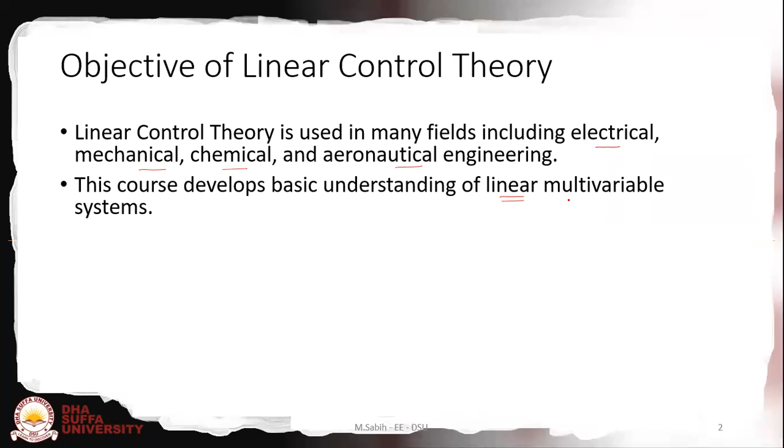The main objective of this course, linear control theory, is that it is used in many fields including electrical, mechanical, chemical, and aeronautical engineering, and many more fields. By doing this course, you will understand basically the linear control systems or linear multivariable systems.

There are three main areas in which we will focus. The first is the modeling, analysis, and the controller design for a linear system. We will do this in both discrete time and continuous time. In continuous time, we will have signals like x of t, u of t, and y of t, while the same signals in discrete time will be x of k, u at k, and y at k.

So obviously k is the discrete event. It may be 1, 2, 3, an integer, while t is a continuous time variable, where t can be, let's say, 1, 1.1, 1.2, and so on.

After completing this course, the students will be able to do the analysis, the control, and the design task. And the good thing is they will be able to deal with different systems. This capability will come because we will see every system from their mathematical perspective, mathematical model.

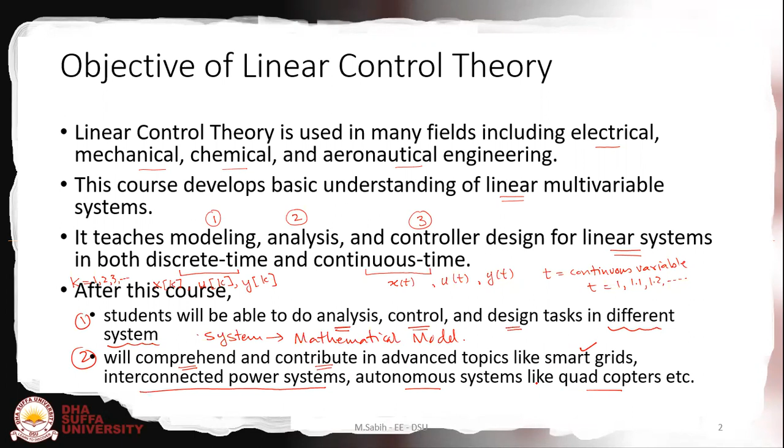The course plan is, we have divided this course into 3 parts. The first part will be based on the modeling and analysis of the linear system, and our plan is to cover this in 4 weeks. I will be caring about the first part. My name is Dr. Mohammed Sabih.

The second part will be based on the controller design of the linear systems, and we have assigned week 5 to week 10 for this part. Dr. Imtiaz Hussain will take care of this part. Part 3 will be the linear optimal control from week 11 to week 16, and Dr. Salman Zaffar will take care of this part.

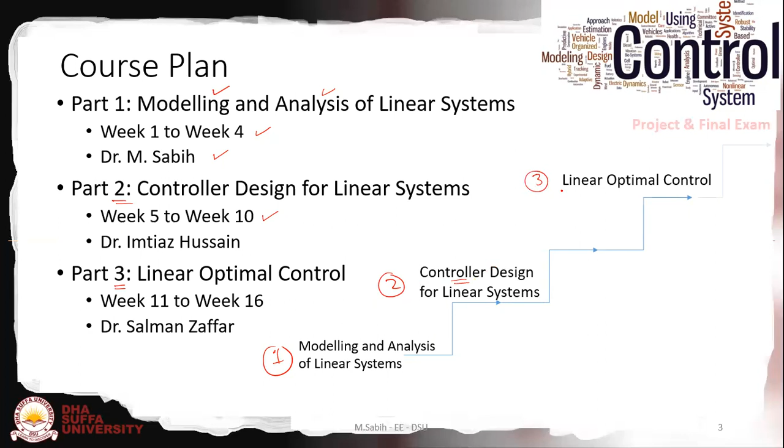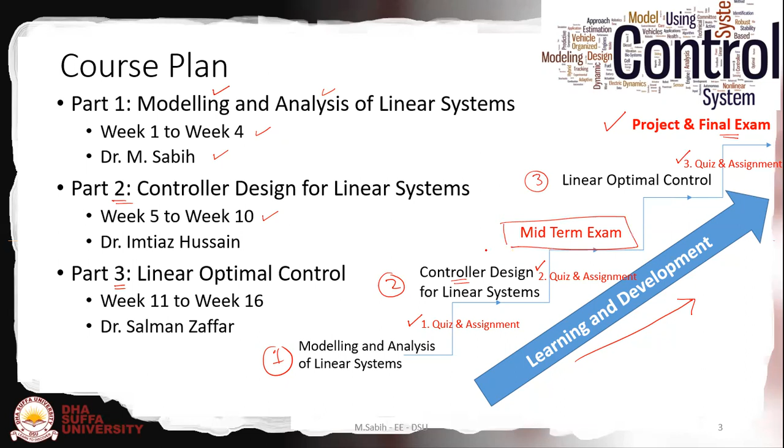Our learning will start from modeling and analysis systems. After that, you will learn and focus on controller design, and finally the third part will be about linear optimal control. This course will end with a project and final exam. During this whole learning and development phase, we have planned one quiz and assignment for the first part, another quiz and assignment for the second part, and another quiz and assignment for the third part. In between, you will be given a midterm exam.

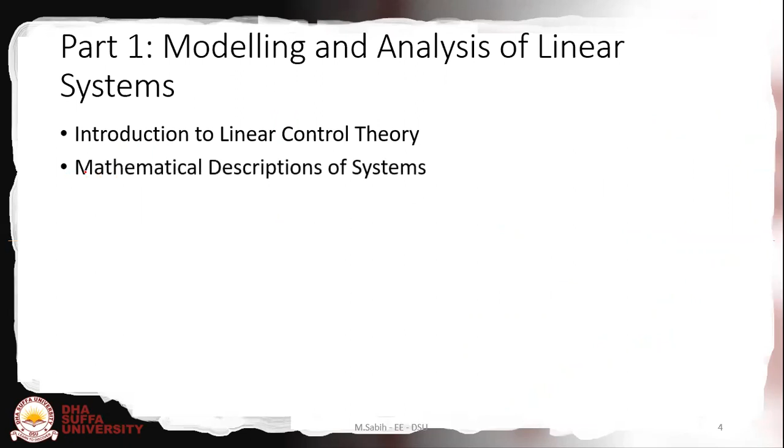Now the details of the modeling and analysis of the linear systems. We will first introduce the theory of control systems, the linear control theory. We will go through some of the mathematical description of the systems. For this, we need to go through a little review from linear algebra to deal with linear control theory. We will focus on the state space realization, and we will also deal with stability, controllability, and observability.

So after learning all these aspects, what you will be able to understand is such kind of simulation model. For example, this is in MATLAB. In this model, you can see we have a source feeder here, 11 kV, and behind this we have a mathematical model.

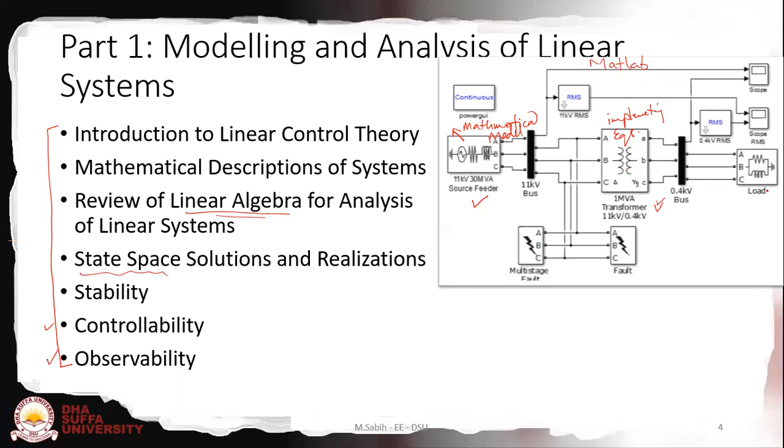We also see the transformer. Of course, this transformer is implementing all the equations behind this box. We have a load, mathematics is there. So this whole thing will be easier for you after doing this modeling. This is an example of the block diagram, another way to represent the mathematical model, and this is the power system modeling and simulation.

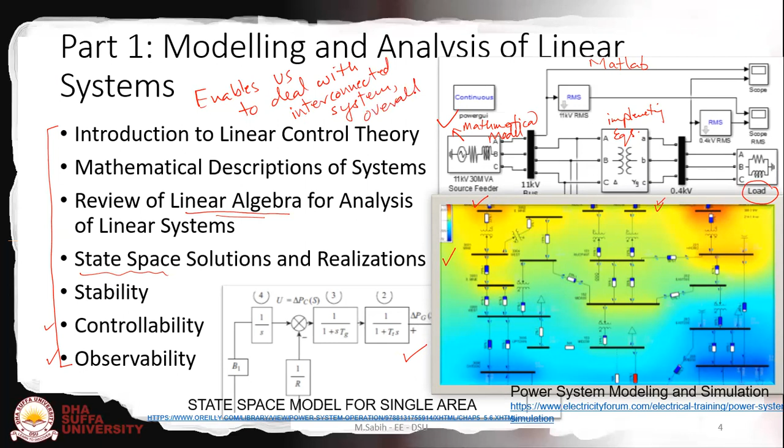After having all these equations and the controller design, you will be able to do modeling and analysis in the software. For example, this one shows a small portion of a grid, a connected grid of a single area. So modeling and analysis basically enables us to deal with variety or interconnected systems, and we can see the overall performance and dynamics.

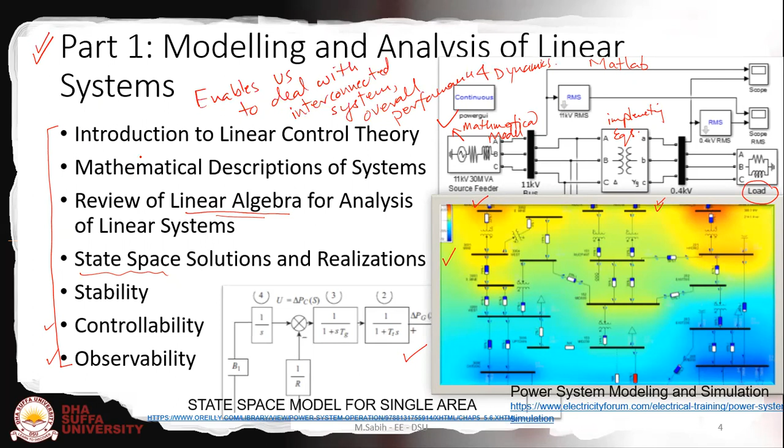Okay, so this is a very important part, and it is so crucial to learn this part. Next comes the second thing, which is mainly the controller design.

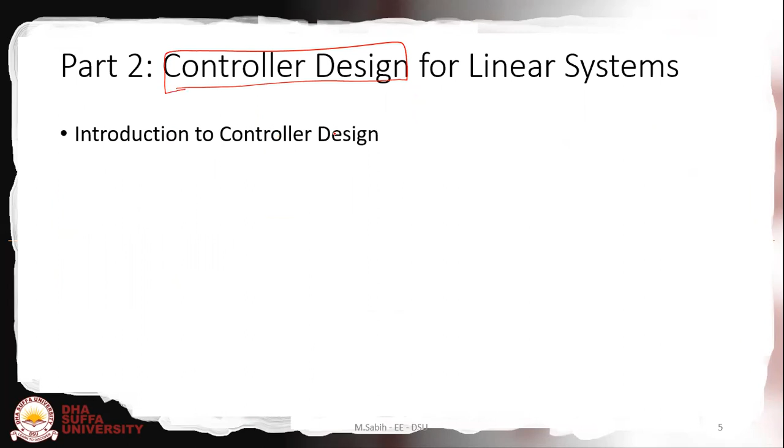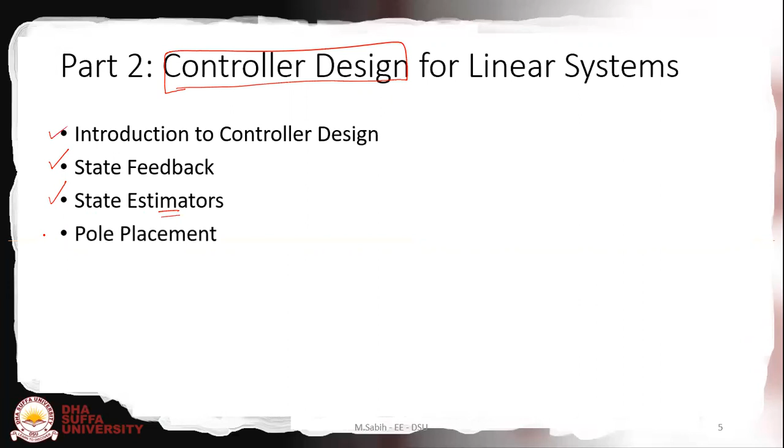We will start with the introduction of the controller design. There is a special kind of controller called the state feedback technique for controller design. And sometimes the states are not observable, so you will also learn about state estimators. And there is another one, called the pole placement method.

Now, this is another example of application of the state estimator. I'm focusing here. This may be a complete power grid, and from the power grid we have a connected SCADA, and we are having all the data here. Having the data here, we can do analysis, we can figure out the bad data, and we can do some kind of optimal power flow and other energy management tasks. And we can even identify if there is an attacker here, and the operator can act appropriately.

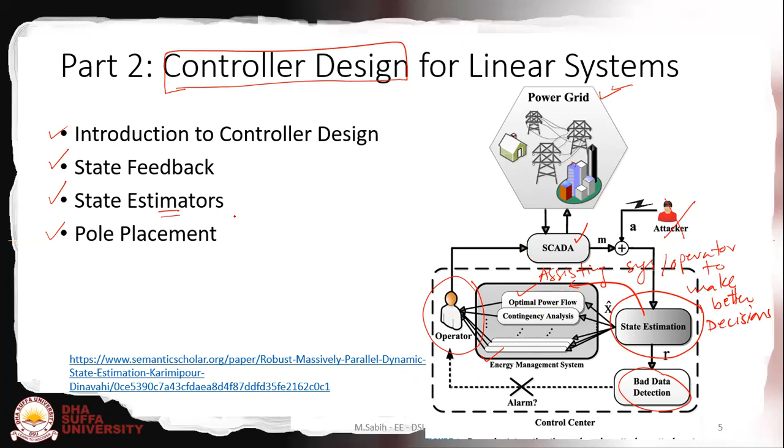Basically this state estimator is assisting. This will assist not only the system but the operators to make better or correct decisions, because it's so difficult to understand all the time. We need state estimators, since sometimes some states are missing and we cannot identify them. So the state estimator application is what I just showed you here.

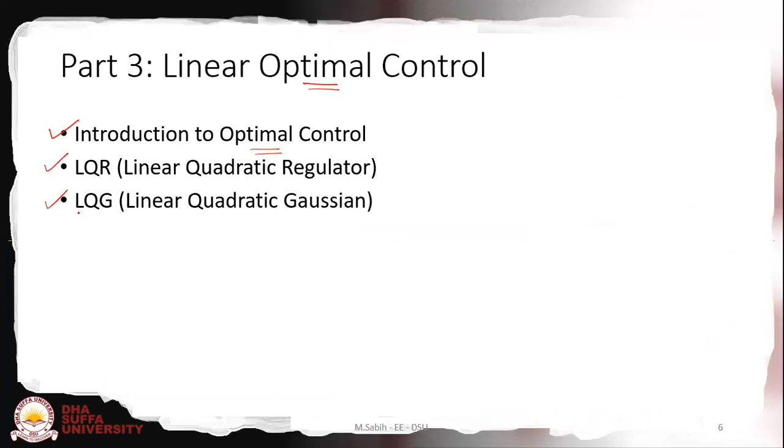The third part comes here, very interesting and very applicable, especially from the economical point of view. In the third part you will get an introduction to this. This is an addition to our course. You will learn about the LQR, and the LQG, the linear quadratic Gaussian and the quadratic regulators.

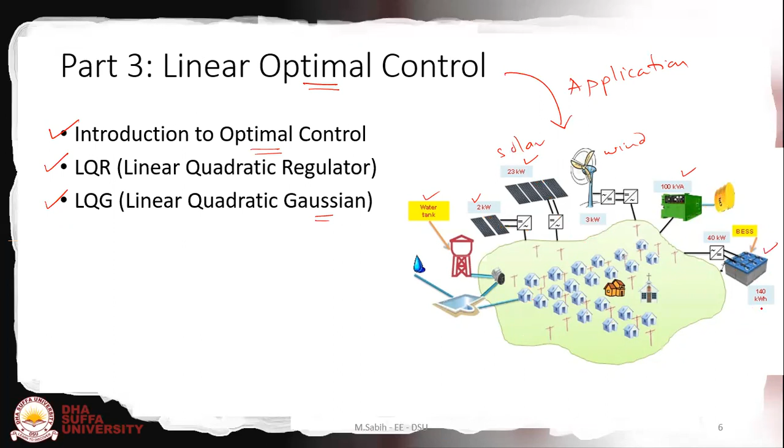This is an example of the scenario in which this optimal control applies. This is an application. So in this application, you can see a small village: we have a water tank, a 2 kilowatt solar system, a 23 kilowatt solar system, a 3 kilowatt wind turbine, solar, wind turbine and diesel, 100 kVA oil, and a battery storage system of 140 kilowatt hour. This is a small village.

Now the problem is, in this application scenario, consider a microgrid comprised of a diesel generator, photovoltaic panels, and a battery energy storage system. The aim is to satisfy the energy demand, the power load from the villagers at all times, while minimizing - this is important, here the optimal will come - minimizing the overall diesel consumption. So this is a kind of optimal problem that the optimal control will solve.

Basically, just to complete the argument, this problem actually falls under something called switched systems, and it can be solved using the dynamic programming approach. So having the optimal control background and understanding, you can deal with and make the right and best decisions in such a multivariable sort of dynamic system.

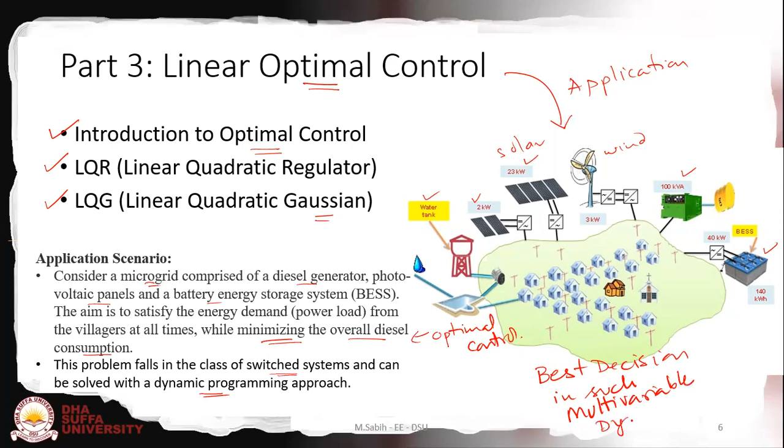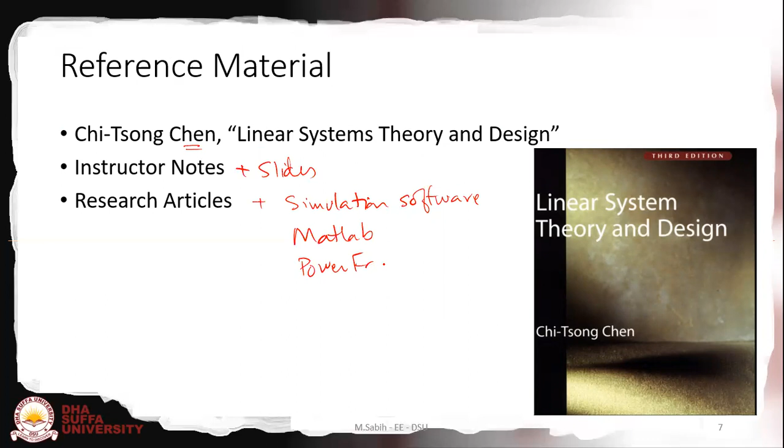The reference material that we are basically focusing on is the Linear Systems Theory by Chen. We will also use instructor notes plus slides like this one, and some research articles, and maybe some simulation softwares - of course MATLAB and others, Power Factory for example, or we will see others.